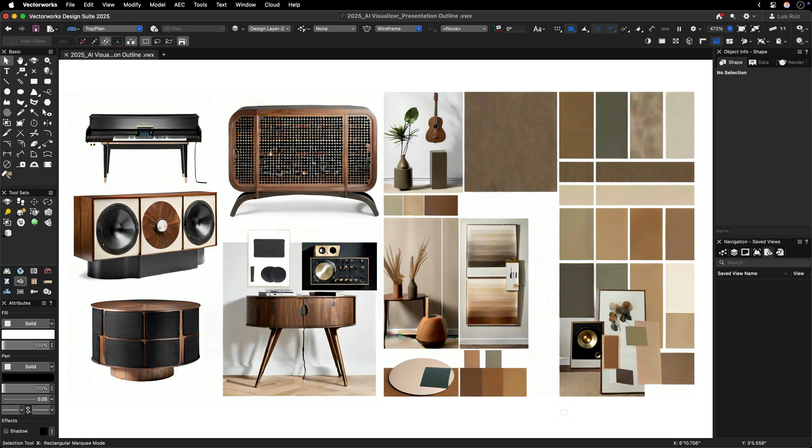After refining my prompt and generating multiple options, I selected these 2 presentation boards. One stood out for its interesting retro-style furniture, while the other featured a well-curated selection of earthy colors and materials. These images will be valuable for our next segment.

At some point, you might be wondering, Luis, how do you remember the prompts you used? Well, I keep a dedicated page for images created in my AI Visualizer, and here's why. Each image retains its embedded information. To recall the prompt and settings, simply select the image and press the Recall Prompt button. This feature makes it easy to regenerate the same image or refine it with new edits.

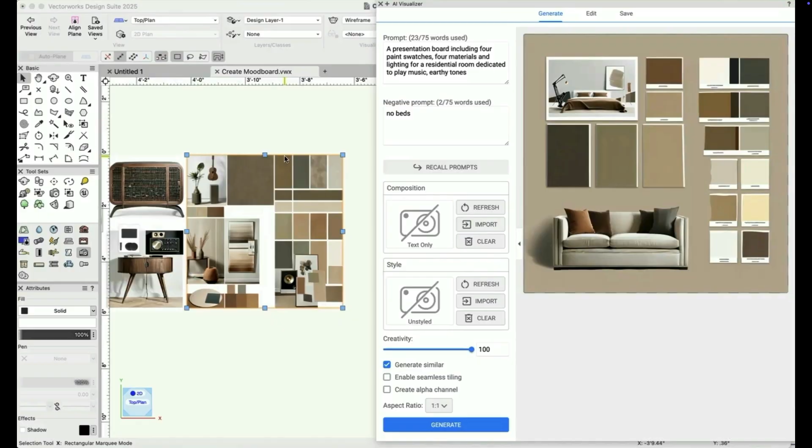I'll take a brief detour from our radio console project to show you some exciting ways to generate presentation boards, especially if you are in the landscape business. I encourage you to give it a try. By describing colors, materials, plant types, and other elements, you'll be pleasantly surprised by the results. For the best outcomes, I recommend including key terms like presentation board, mood board, or collage in your prompt.

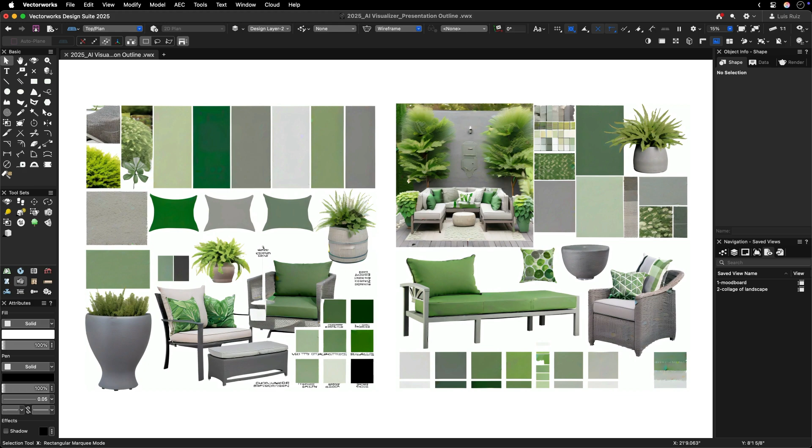If you work in the entertainment industry and have been invited to design a set for Hamlet, AI can be a valuable assistant. It can generate information for medieval architecture, costumes, and ornamental details, elements you might otherwise overlook, helping you bring a richer, more immersive vision to life.

Now let's return to our custom furniture assignment. To generate ideas for this specific unit, I'll start with a well-crafted prompt. I've learned that keeping it concise yet rich in keywords yields the best results, including details such as what it is, what it's made of, key design elements, and its location helps guide the process more effectively.

Let's return to our AI visualizer. After pasting the prompt and setting the creativity level to its maximum, we generate our first image. Now I want you to focus on the style area. Notice how, after uploading images from our previous presentation board, the results are becoming increasingly aligned with our vision. This process, known as style transfer, helps reinforce and refine the design direction.

After generating dozens of exciting design variations, I want to share the ones that truly caught my attention. Each concept features a rounded cabinet, a turntable, and a speaker, blending a retro aesthetic with a modern twist. At the center, you'll see the standout design, the hero image that rose above the rest.

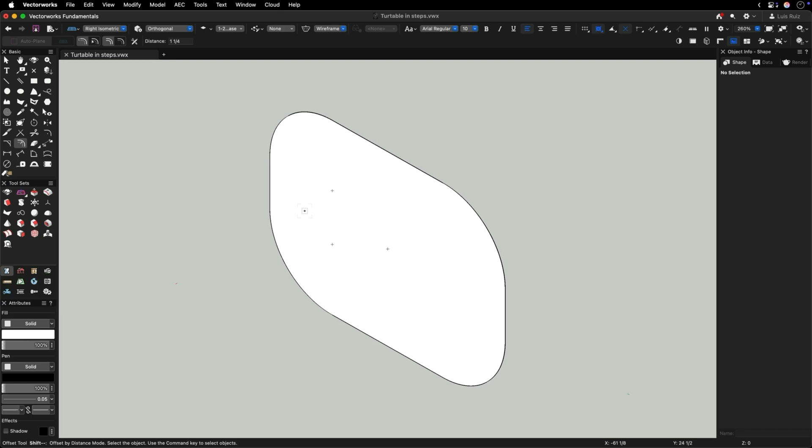I'd like to share some key highlights from our mass modeling process. Our initial challenge was designing the cabinet frame. After careful consideration, I decided on a design using individual rings. This choice was primarily driven by texture mapping requirements, allowing for more precise and realistic material application.

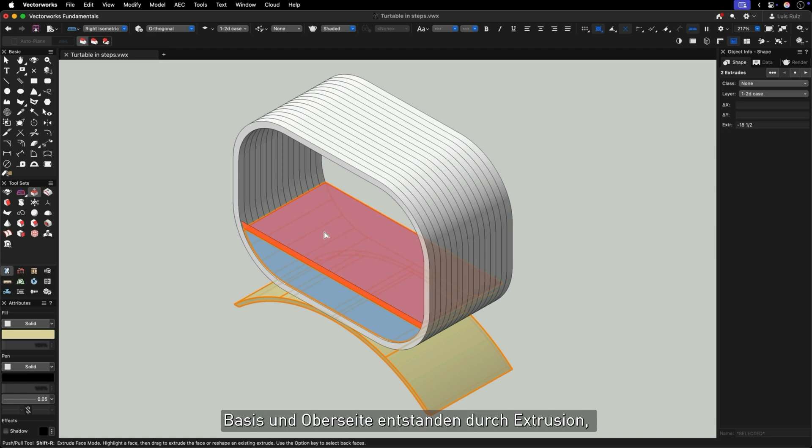The cabinet's base and top were created using simple extrusion techniques. To achieve a more realistic rendering, I applied a crucial tip: avoid sharp edges. This is where the fillet tool proved invaluable.

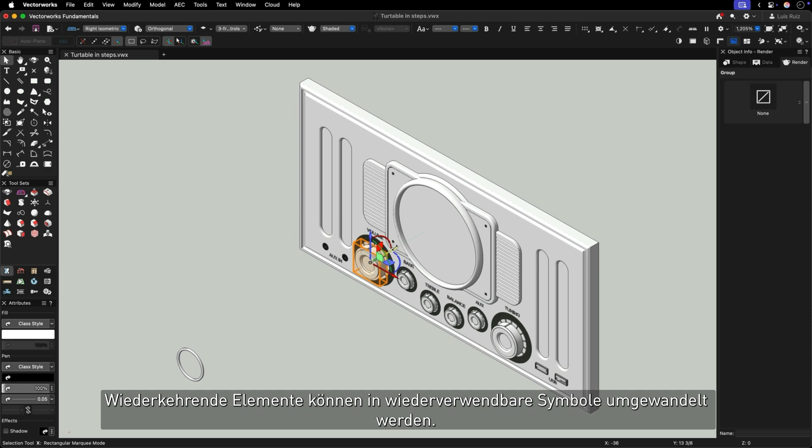The front console featured numerous intricate solid objects. The primary modeling tools utilized were extrude, push-pull, fillet, and text-to-3D conversion. At this stage, it's advisable to consider converting repetitive elements into reusable symbols for improved efficiency and consistency.

While the turntable concept is relatively straightforward, it needed careful organization of objects into distinct groups. The X-ray effect in 3D dragger cursor proved invaluable for precise translation of objects along fixed axes.

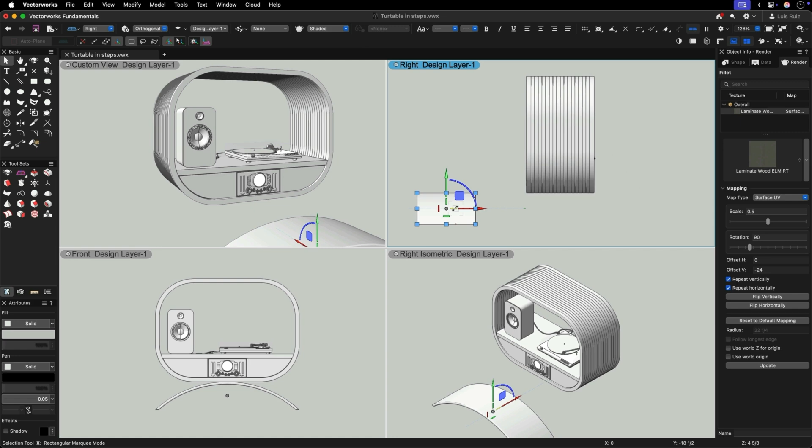Here is a tip: I highly recommend activating the multi-view environment. This powerful feature significantly streamlines the process of accurately positioning objects within your design space.

And there we have it. After dedicating several hours to crafting the individual components, our first model stands complete. To provide context and a canvas for shadow play, I've incorporated a base surface and surrounding walls. At this stage, we transition primarily to shaded mode, setting the stage for the addition of lighting elements and potential background scenery.

Now that our model is ready, it's time to move on to the most fun part of the design: creating textures and entourage. While Vectorworks already provides access to plenty of resources, like textures and tiles, we often find ourselves needing images that don't show any repetition.

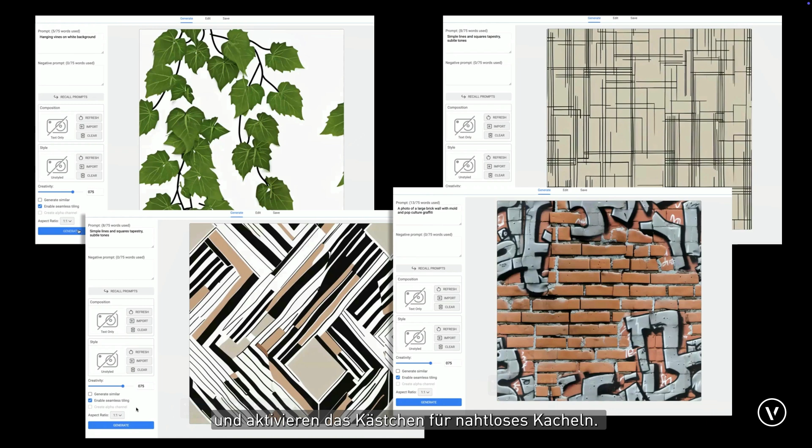Let me show you the process. In our AI visualizer window, we type a description of our material, then we make sure we tick the box for creating seamless tiling. Keep adjusting the level of creativity, and you'll produce more variety.

Then we get to process all the images. When creating seamless tiles, one of my key recommendations is to check how they look when placed side by side. This helps ensure a truly seamless appearance when the tiles are repeated.

My personal collection of tiles is growing more diverse and interesting. I make sure to keep the ones that I'm confident will be useful for future projects.

Now let's explore the materials I've selected for our cabinet and room design. For the floor finish, I selected a darker and rougher wood planks texture. For the console, I've chosen a lighter wood that'll create a more sleek frame complemented by stainless steel for the front plate and knobs. I pictured these would add a modern touch. To complete the ambiance, I've selected a textured paint for the walls, which will add depth and character to the room.

I was not quite sure if I'll use these, but I also prepared a collection of seamless tiles featuring various natural stones and gravel.

A friend of mine suggested an interesting idea: creating illustration covers for long-playing records. Since LP covers are square-shaped, they were relatively easy to create. Can you guess what prompt I used to generate these illustrations?

To elevate the level of realism, I wasn't content with a simple black plastic surface. Instead, I envisioned something more authentic and nostalgic. What if we crafted a prompt that would generate images reminiscent of vintage long-play vinyl records, complete with their iconic circular labels at the center?

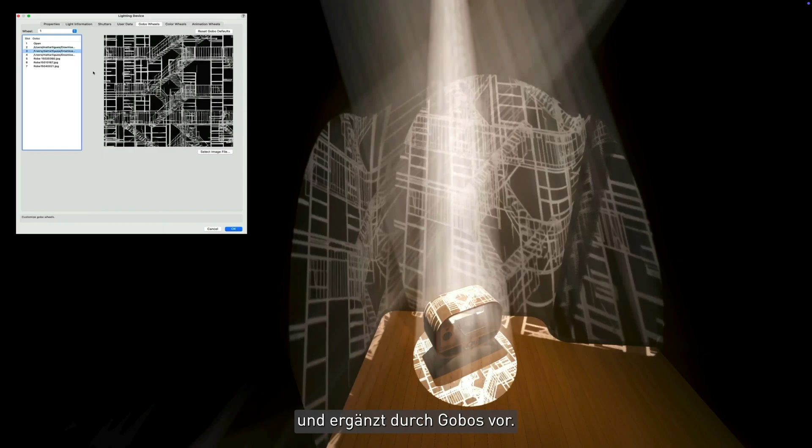Now that we've reached this stage, it's time to elevate our design with some stunning renderings using RenderWorks. Traditionally, this is where I would consider the job complete. The unit's geometry is impeccable, the materials are richly detailed, and the lighting creates the perfect ambiance. But you know what? There is still room for more AI.

By utilizing our in-painting feature, we can explore alternative compositions. For a better sense of scale, we could add a young person. This would help me understand better the proportions of the space. But what if we add a rustic stone wall with vines as a backdrop? I guess there is only one way to find out.

Okay, so I went ahead and made several enhancements to the scene. I applied a stone texture to the back wall, and I also decided to integrate the hanging vines. But if you look closely at the floor next to the unit, you'll notice I've placed a rack of vinyl LPs. I suppose this will add a touch of nostalgia and personality to the space.

By now, you're probably wondering how Luis created those vines. Well, it's actually a simple process. We've discovered that when creating seamless tiles or individual images, enabling the alpha channel opens up a whole new level of possibilities. For plants and trees in particular, we can achieve amazing results. The best part is that we can save these not only as textures, but also automatically create prop objects.

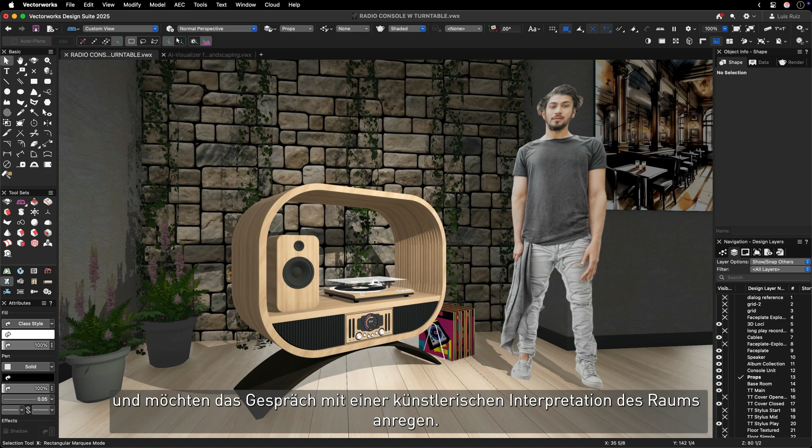Let's take this finalized view and process it through our AI visualizer to create a less photorealistic rendering. Imagine we're preparing for an initial client meeting and want to spark a conversation using a more artistic interpretation of the space. In our AI visualizer window, we can easily match the view from our application.

To create your desired sketch style, simply add a concise prompt and adjust the creativity level. I recommend experimenting with key terms such as sketch, watercolor, artistic, freehand, and ink oil. One important tip: remember to keep your prompts simple.

The flooring appears more defined, with richer textures and depth. The rocks in the background now exhibit a rougher, more realistic surface. The wood grain is distinctly visible. Even the character's outfit has been refined, boasting more realistic fabric textures and folds.

However, this is not where our journey ends. The shaded mode image we created earlier can serve as the foundation for another AI-generated iteration. This time, we'll aim for a more realistic effect by incorporating prompts such as realistic, photography, attention to detail, and intricate into our AI request. While AI-generated imagery doesn't replace the precision of ray-traced rendering, it excels at producing visually appealing and acceptable images in a fraction of the time.

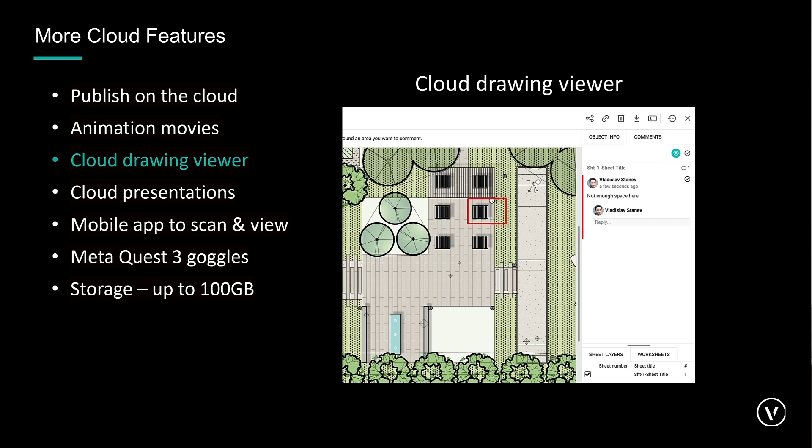The Vectorworks Cloud offers features to create presentations and walkthroughs with interactive points that let you jump around your project.

There is a mobile app that can scan to model, and then you could directly open these models in Vectorworks after processing. This is a little sneak peek to the completely redesigned iOS application that is coming up in March.

You can also use the Meta Quest 3 goggles to see your model in virtual reality. And lastly, it's storage. You have private storage, again managed by us and completely private.